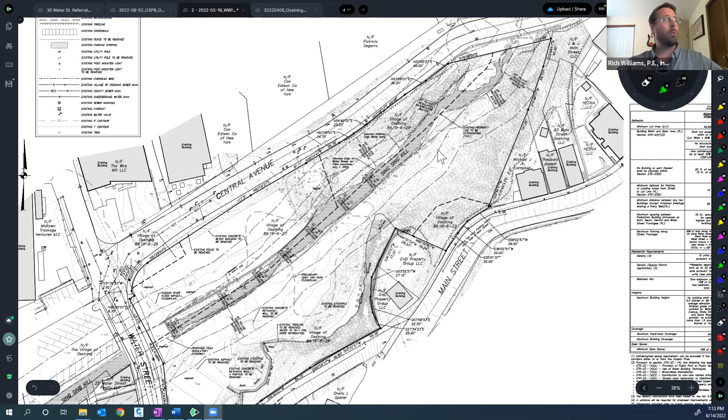So what we've done, and Maxwell will talk a little bit more about this in a few minutes, is we've focused our proposed development on the western portion of the site within the existing development envelope. A lot of that is to minimize impacts to steep slopes and tree removal, particularly around the Sing Sing Kill. To hit the high level of the components of our project, we have a 4-story parking garage in the northwest corner of the site, which sits in a very similar location as that existing masonry block building.

On the opposite side of the kill, we have our 8-story mixed-use building, which contains retail space on the first floor, as well as 109 affordable units and community space. We do have a connection, I believe it's on the 5th floor, that extends from our building to Main Street. So there's a direct pedestrian connection to Main Street. That was an element that the village thought was important to add.

And as you heard Linda and Jaime mention, and this really relates to zoning, we are proposing a subdivision of the property with a line that runs north-south in the middle of the site. What we're proposing to do is leave the eastern portion of the site for the village, and the western portion of the site would be retained by our project team, WBP Development.

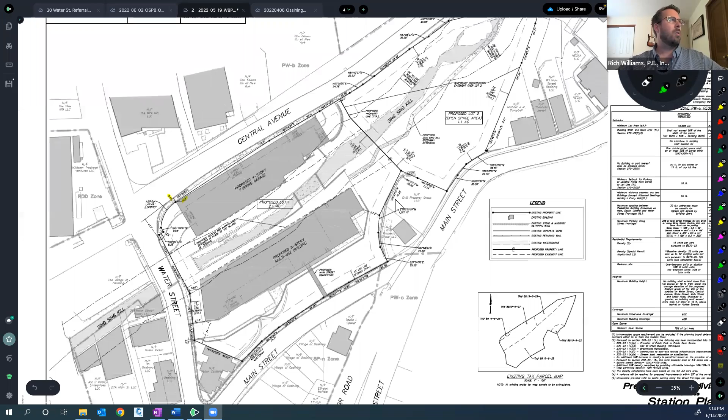In addition, some of the improvements that are being constructed are an extension of the Sing Sing Kill Greenway. There's an existing trail that follows the kill north of Central Avenue. We're going to be tying into that, running through the arch culvert, then coming southwest, where we're going to create a path that connects to the greenway, where we basically landed on the ground. You'll then have a walking path which leads you to a linear park in between the buildings, which will then allow a direct pedestrian connection from Water Street all the way up through Main Street.

As far as what we're really before this board tonight and talking about zoning, as a result of the site constraints on the property, namely the steep slopes, the kill, and the forested area to the north, and also an effort to stay in the existing development envelope and minimize impacts to those features, we've really had to locate the proposed development in the northwest corner of the site. We also had to do that while meeting the objectives of the village. Those objectives were creating this linear park, having an extension of the greenway.

We're also doing stormwater improvements in the kill, providing public parking on the fourth story of this garage. And just to spend a couple minutes before I talk about the variance, talk about the garage, in order to get the 4 levels of parking, one of which is public parking to the village. Again, the fourth story of this garage will have solar panels above it for green energy, but this parking will strictly be for the village on that 4th level.

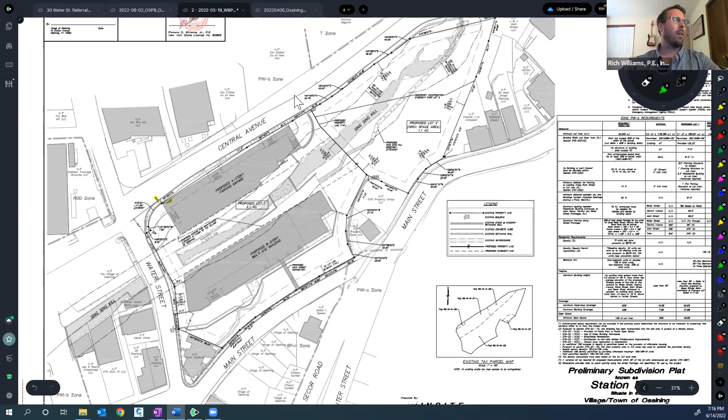In order to make that work, as you know, Central Avenue rises in grade. What we did was we created entrances to the garage along Central Avenue. That allowed us to take advantage of the grade rising along Central Avenue and also minimize the size of this building by not using internal ramps. And I'm only pointing that out because in a couple of seconds, I'm going to talk about variances, and that all plays a part into why we designed things the way we did.

As far as the variance necessary for this project, we're going to request variances for the parking structure being within 20 feet of the street. Your code requires that we hold 20 feet to the street line, again, in order to maintain proper separation to the kill or maximize separation to the kill to allow for a linear park. We're going to stay in the location essentially of the existing building. That puts us close in this corner of the property. We're 1 foot off the property line and 8.5 feet off the street line. So we'll need variances for both of those.

Also, our mixed use building. We had previously identified needing a variance for the front of the building being within this front yard setback. We just made some revisions in the last set. We were able to adjust the size of this building, so we're currently evaluating that. But although we identified it as a variance required in the package to you, that may drop out the next time we're before you.

We are going to need a setback from section 270.23D, which is the minimum setback for the parking or loading areas, being 10 feet to the street or lot line. Again, we have less to our parking structure here. As a result of the subdivision, our impervious coverage on this site alone is 65.6%, as opposed to the 60% required by your code. Again, that's something that's being created because of the subdivision line. If we were to take the entire property as a whole, we would be less than that coverage.

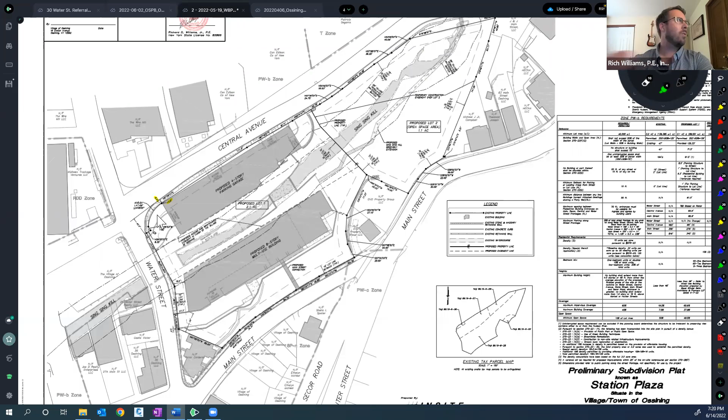Good evening, everyone. Before Maxwell starts, I'm looking at the faces of some of the board members, and I know we have not seen all of that area variance information that was just given. It wasn't given to us in our packet, so if we look kind of puzzled, it's because we have not seen that in its entirety the way it was just written out. It was just said. It is in the packet.

Yeah, and I think it's also still being finalized, but we did want to get this on your agenda to start getting you familiar with the project, and also to get any SEQR comments. Certainly, we're not at the point of making any decisions on those variances yet. And so that list is still being finalized, but we will make sure that you get a final list that's clear and easy to follow of the required variances.

Thank you. And I do apologize. I went through that pretty quickly, thinking you had already seen it. So if there are questions, we're more than happy to walk you through things in detail. Thank you, everyone. Again, my name is Maxwell Pau. I'm an architect and urban designer and a partner at Beyer Blinder Belle. We've been working on this project with the village and Wilder Balter for some time now.

And what I've done here is I just put together a little brief set so that we can go through the design. I think Rich did a really good job of laying out the land of what's happening on the site. But I can show some additional plans and pictures to give you a better sense of what we're proposing here. For us, we were drawn to this site because of the design opportunities that it presented. We're interested in designing a transit-oriented development with affordable housing on a formerly industrial site, just steps away from the train station. So for us, that was very exciting.

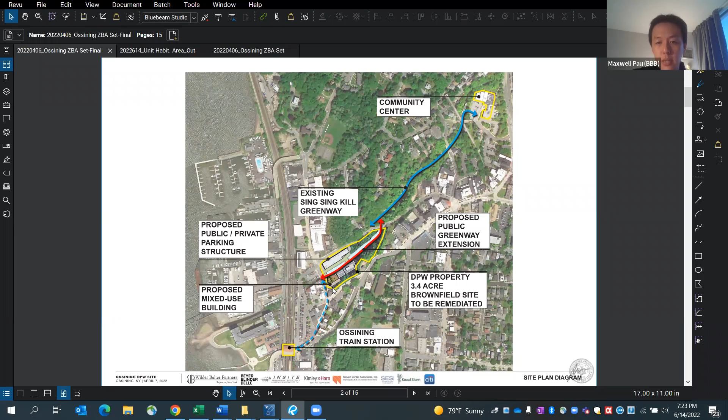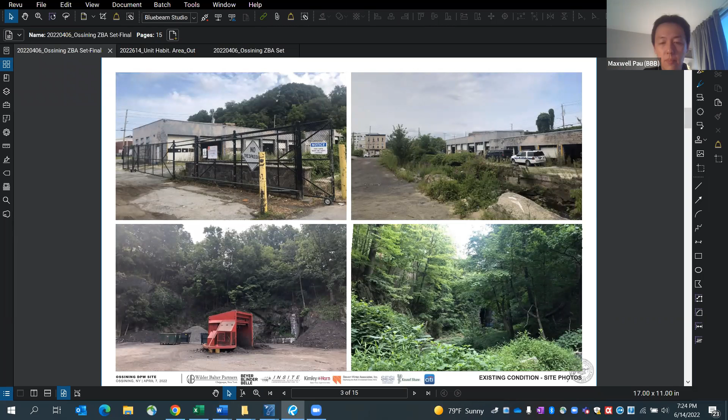I'm sure you're well aware of what the site looks like. When we visited the site for the first time, we were really struck by the pure physicality of the site and the multiple layers the site has to offer, including the very dramatic and drastic topographical changes, but also this change of character from a very urban place to an intensely natural place. You can see in this bottom right corner the forested portion of the site that we are intending to maintain.

So the shortest portion of the building is right off of Water Street, and the building steps up as it goes up along Main Street. So I'll show you an image of the building from sort of Secor and Main Street looking down. The intent is that the building sort of steps up with the topography of the site along Main Street. So you'll see how we sort of tried to achieve that.

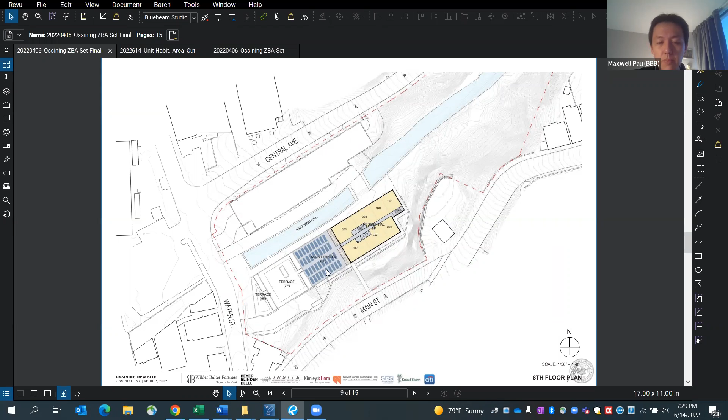The 8th floor happens to also have on the terrace solar panels. This building will be targeting a LEED Gold status, so there will be some solar generation on this project as well. And then when you get up, so that's the top floor. So the 8th floor is the top floor.

And then this is an elevation. If you're, I guess, sort of standing in the canal looking directly onto the building, you can see how the building steps up. Water Street is right here. The retail is right here at the base here. Residential amenities, residential lobby right here, and then the community facility space is right here on this end here. And then the forested portion of the site is on the left-hand side of this. And then you can see how the building starts to step up as the building rises along Main Street. Right, so it's an 8-story total height for the building.

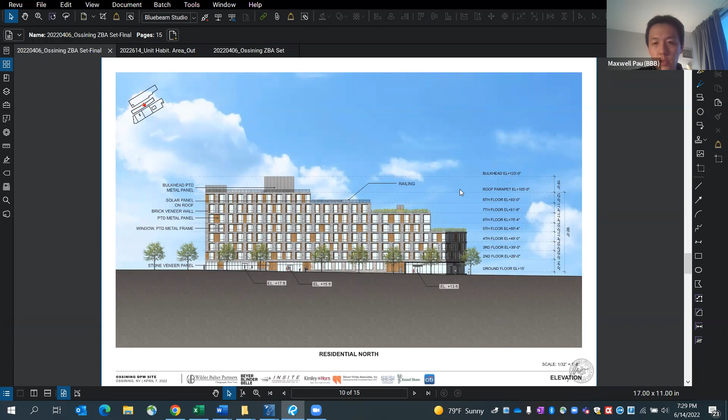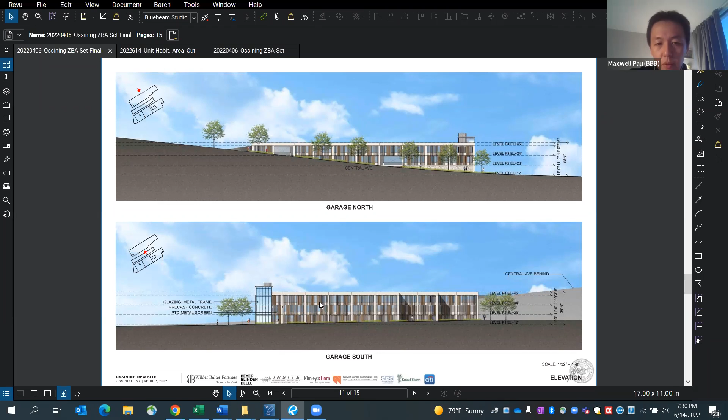And then just similarly, this is the elevation of the garage. So this is the elevation along Central Avenue, and this is the elevation of the garage along the canal. Again, just trying to use robust materials that reflect sort of the texture and the tonality of our surrounding here, which is heavily forested. So we have these sort of metal screen panels with a sort of wood-colored metal panel that sort of intersperse in the design of the facade.

So with that, I'm just going to kind of walk us through some of the views that you actually have in your package. So this is the view from the corner of Water Street and Central Avenue looking back. So this kind of gives you the best sense of the project. This is the existing photo of the same viewpoint. Essentially, this is the existing DPW building. So that's being replaced by the garage on the north side, the new residential building that starts to step up right from Water Street and up the canal. And then you can kind of get a glimpse of the canal right in here.

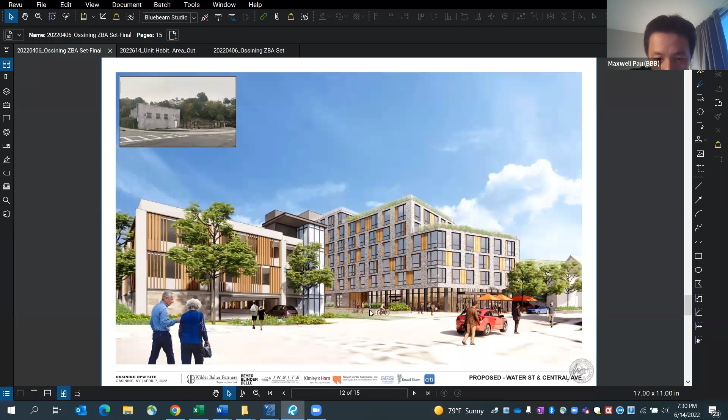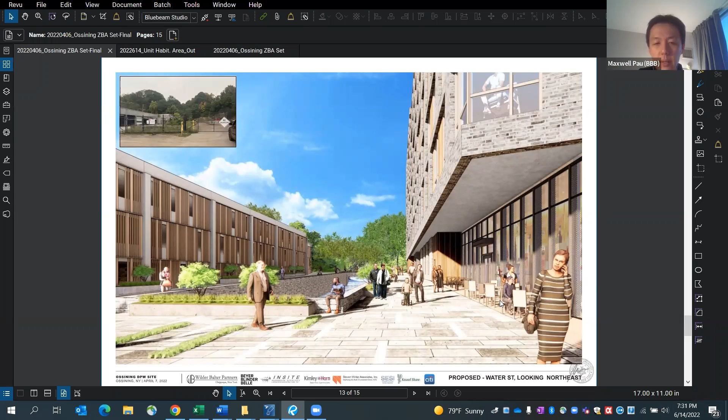And as we sort of walk our way closer to the building, this is where you would be today if you're up against the fence that's leading into the DPW. So on the right is the mixed-use building, on the left is the garage, the canal is in the middle. Right on the right here is the retail that's fronting Water Street and turning the corner up into the canalway. And then just a little further up, this is the residential lobby entrance. And then just sort of behind this wood panel here is the community facility space on the far end of the building.

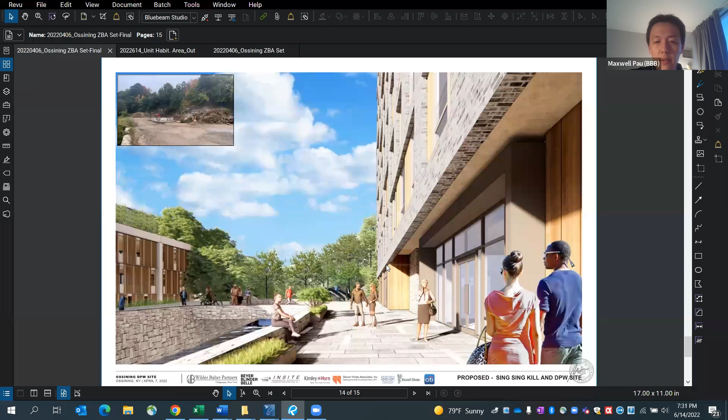And I think I have one more image, which is the view on Main Street and Secor. And this really kind of gives you a good sense of the scale of the building on Main Street, right? So again, at no point is the building rising greater than 4 stories above Main Street, or at least as viewed from Main Street. So you can see how the building starts to step down and kind of nestles back into the site. So that was a really quick overview of the overall design concept. If you have any questions, feel free to ask.

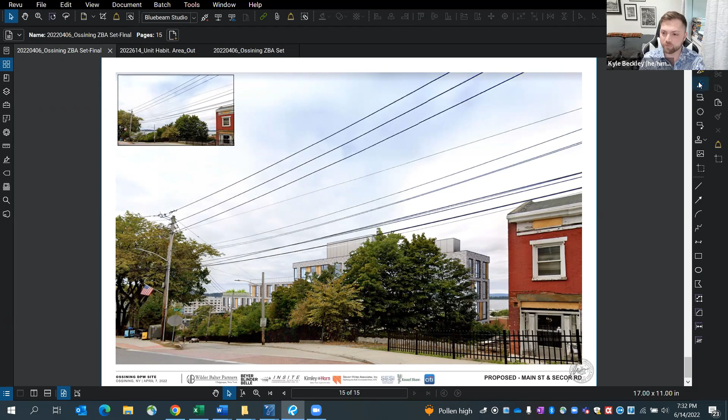Kyle, I see your hand is raised. Yes, thanks, Marlene. My question was about, and maybe I misheard, on the parking garage, is that covered on the top with solar panels or is that open? Is the solar panel just on residential? I think there was some change. Jim, can you speak to that? Because I know we were talking about that. Yeah, the plan is for solar panels, the garage as well as the residential building. Yeah. And I know that's not necessarily our purview because that would be SEQRA and planning board, but I was just interested based on, I saw one picture show one thing, but heard another. So glad to see you're doing solar panels on both.

I have a question of my own. Are you doing a floodplain review? I was just curious about going into the basement on that area that is prone to flooding. Floodplain has taken most of our time on this. Okay. Rich, you want to take that? I'm just trying to figure out if there's a car in the basement, is it going to end up on the 3rd floor when the first rain hits?

So the first thing we've done is we've set the elevations around the building, and particularly at the entrance to the basement parking, to be above the floodplain elevation, so to prevent waters coming in. One of the things we've talked to the village about is whether or not parking would be allowed down there based on the code and based on FEMA's regulations. We've had an engineer who specializes in floodplain analysis look at this, and yes, it is permitted.

We're also doing a floodplain study, which is being reviewed by the village engineer at the moment. We've already submitted it just to assess any potential impacts from this development on the floodplain. But the intent in setting the elevations was to prevent water from entering into the basement as part of the building design, and it hasn't been completed yet.

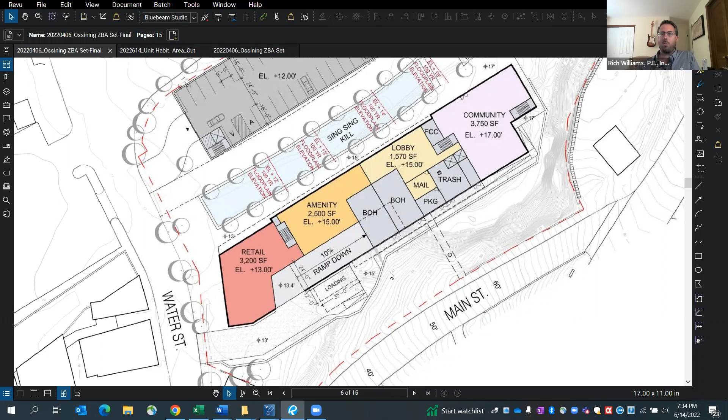Obviously, we'll have to be looking at the design of the foundation for hydrostatic pressures. That's one of the elements of the floodplain code. Also, we'll probably be looking at installing some pumps just for an extra backup and safety. Again, with all mechanical equipment being kept above floodplain elevation as required by your code. But yes, we're looking very closely at it and working with the village very closely.

It's a great question. Are you also looking at impervious coverage, like pavers and things that will allow the water to drain back and not continue to hold on to the water, or more grassy areas where needed? I know it's a concrete building, but is there anything else that you're looking at to help some of the drainage issues?

Yes, we've done a full stormwater pollution prevention plan, and I didn't want to go too much into detail, but I'm glad you asked, because there's a bunch of good stormwater things we're doing. We have a green roof on part of the mixed use building to help limit some of the impervious surfaces. That terraced area, a large portion of it's being designed as a green roof.

We also are looking at different paver materials, particularly on the side of the parking garage, to see if we do want to do some sort of grass pave. Final decision on that hasn't been made, but we have treated it as an impervious surface already in the stormwater calcs to be conservative. We're providing stormwater quality treatment units on all of our stormwater discharge points before anything discharges to the kill. So we'll get water quality treatment.

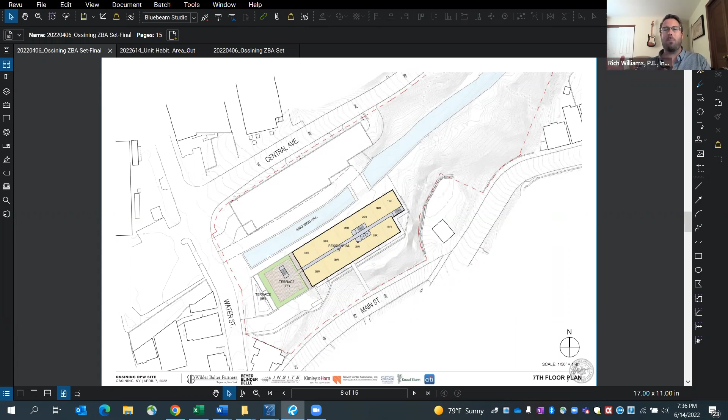We've also done a larger scale analysis, because believe it or not, one of the things I often struggle to explain is when you're this far down on a river or a stream or a reach in a larger drainage basin, it's actually beneficial to let the water go faster. What happens is, by the time the peak of the overall kill comes down the hill, if we hold our water back too long, we can actually line up with the peak.

If you ever listen to CBS 880 News, you'll always hear the Passaic River is flooding 3 days after the rainfall event. And that's because down at the end of the river, it takes that long for the peak to come down. So, we've been working with the village engineer on timing when we release our stormwater and strategically releasing it earlier based on our downstream position.

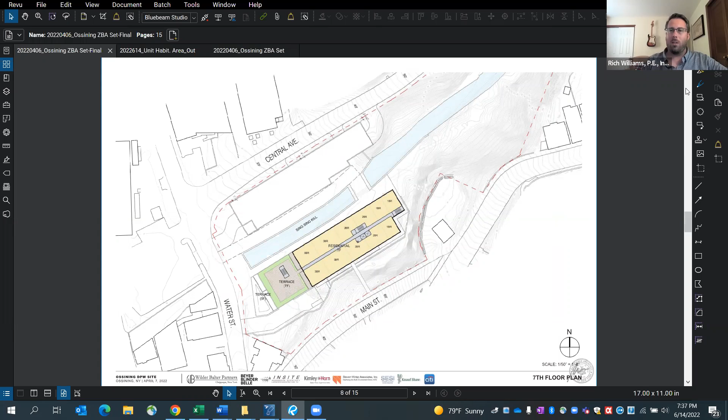In addition to that, we are providing a stormwater basin along the kill. That is being developed in concert with a series of weirs that will cross the kill. One of the issues the village has historically had in maintaining this section from flooding is during the first flush, a lot of the debris, garbage, large tree branches, come down and hit the culvert at Water Street and form a dam under the culvert, so the water backs up into the kill.

And the first place that it is going to fail when that happens is the DPW site. And then from there, it overflows Water Street and into the parking lot on the west side, in between the railroad tracks and our site. So what we've been talking about, and this was actually part of the original RFP, was building a stilling basin off of the side of the kill, which integrates with the kill.

And we're doing that basically up into the site, closer to the culvert, in an area where the topography allows, to help dissipate velocity. We're creating basically a shoaling basin. It'll be a little deeper than the kill itself, so that debris can get caught and collected and more easily maintained. That basin has been strategically located with a series of weirs to cross the kill, so that we can try and catch that material in the large, deep valley to the east of the site.

And the hope, and this is something the village engineer has been talking about for a while, the hope is by catching the debris there, where we have a better opportunity to create higher floodwaters, is it will no longer clog the Water Street culvert and create the problems for Water Street and the downstream parking lot.

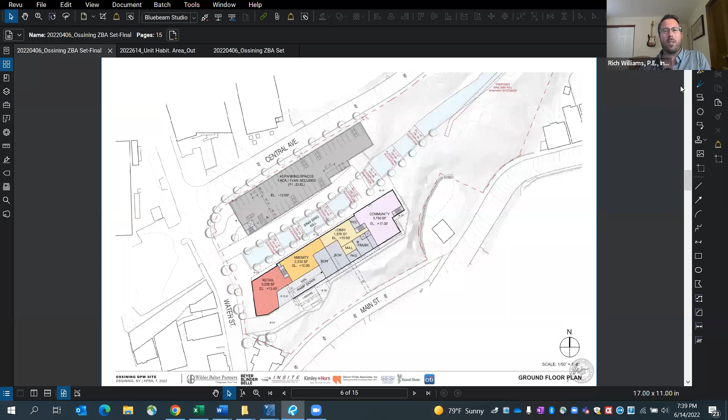Great question. So we have provided tree removal plans. A lot of the eastern portion of the site, we're actually not touching any of the trees, particularly on those steep slopes. We don't want to. The area above the existing DPW yard, between the yard and Main Street, has a lot of smaller growth trees. We are taking trees down in that area, not because we want to, but actually from a geotechnical engineering standpoint, we have to. Those trees probably should never have been allowed to grow. They're actually compromising the slope stability.

Just to the right of Maxwell's cursor right now, there's a house. Behind that is a series of retaining walls that actually ties to the walls on the DPW yard. One of the things that the village negotiated pretty well with the developer was making sure that the majority of those walls are actually going to be on the developer's property, not the village's. So we do have to make sure that those slopes are secure and stable for the future. So there will be some tree removal along those slopes in order for us to properly maintain the slope. And again, it's been recognized even by the village engineer that probably should have already happened.

Other than that, there's a handful of trees necessary to come down that are invasive in and around the kill as part of creating the linear park and redeveloping the training walls for the kill. There's a small number of trees being removed for that 4th floor entrance to the garage off of Central Avenue. But for the trees that we are removing for the development, we are providing mitigation. And again, anything on the eastern side of the property, where the majority of the forested area is, we'll be preserving. And that'll actually become village-owned property, so it stays preserved.

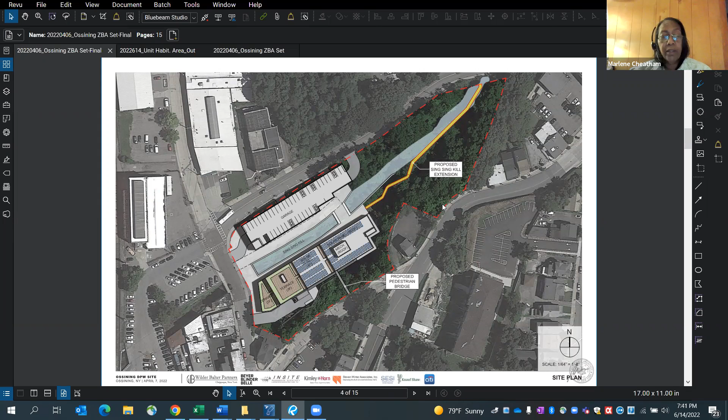Okay, any other questions from the board? Okay, and I'm gonna go back to Linda and Jaime. So for tonight's meeting, anything that we would like to bring back to the planning board as they go through the SEQR process? Yeah, and I think you've already identified some things. They're all things the planning board has already been focused on. Obviously, the floodplain, the stormwater management, the flooding issues with the kill, the tree removal, wildlife, those are good comments and things that the planning board is also focusing on. So, along those lines, if you have any other things like that you think are of concern that you would like the planning board to make sure they're taking a look at.

Yes, Michael. Yeah, a couple things I think they should look at. We discussed a little bit about each one so far. This is going to be an 8-story building, so I'm sure that's not going to be missed by the public. It's going to be the same height as the new condos that were developed across the street. So it is a fairly substantial building, and I would think any kind of viewscapes from above would be something they would have to look at. Also, I drove past the site, and there's a significant amount of debris, not only in the kill, but also in the garage, old trucks, things of that sort. I assume that all of that's going to be taken care of.

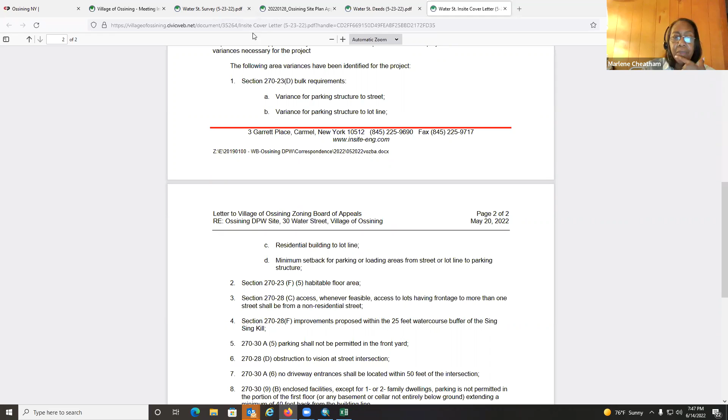What I was asking for is, this is very broad brush. I would like to know if there was a more detailed one. It just says variance for parking structure to street, but there's no numbers with it. You want the numbers? Yes, exactly. Normally we get the worksheet that shows all that, and that wasn't there. They're going to have to give you the worksheet at some point because they also have to do that for the habitable floor area. For each type they'll give you what they're supposed to be, what they're proposing, and what the variance difference is. So this will be broken down with more detail as we go along.

Yeah, so some of the finalization of those numbers is still happening. And we went over some of the details like on the habitable space today, for instance. We definitely want to get that to you, but this is the listing essentially. We don't anticipate anything beyond the listing of the types of variances that are going to come forward. Now, one of the things we did talk about earlier today was the habitable space. Rich and Maxwell, you brought that up today. So I want to know whether you wanted to talk about that today or get into those details at a later meeting.

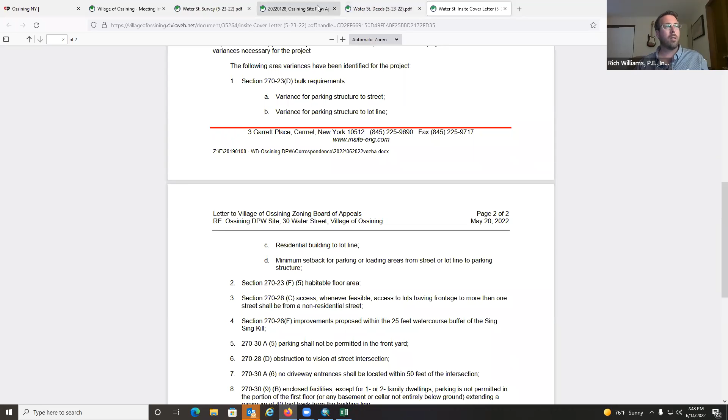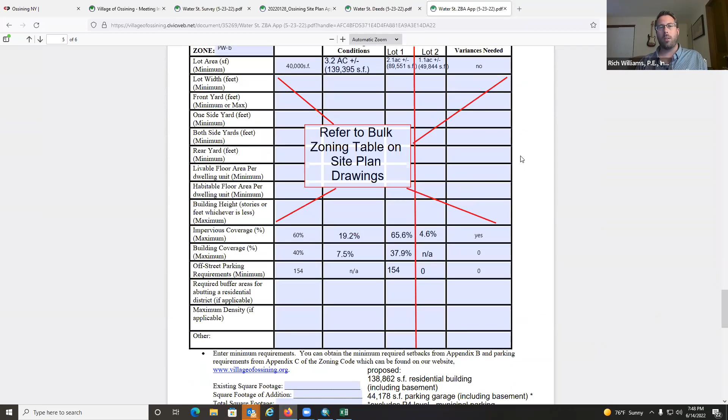But before we jump into that, just for the board's benefit between now and the next time we're before you, as part of our application package, on our preliminary subdivision plat as well as on our drawing EX1, we do have a zoning conformance table which walks you through the items in the zoning. Some of the items which aren't part of your typical bulk standards aren't on that table, which is why we cited them in the letter. But we're developing a simple table, because we have a bunch of different memos flying around, which talks about what's required, what's provided, and the variance we'll be seeking.

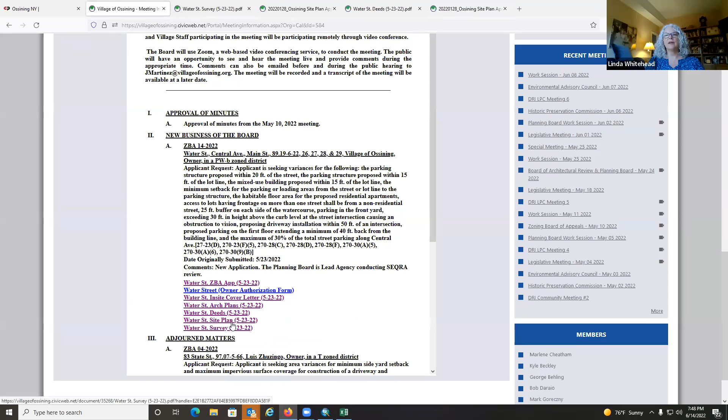So it's on the Insite site plans, the table. Yeah. So that'll be a good preview for you as to what's going to be on the simpler matrix we're going to provide. It's that large table on the right side of the sheet.

So this is that bulk table we refer to. Yeah, we're in the process now of simplifying it just to the variances, because that's a lot to go through. Plus, there's still some numbers we're still working out, like the layout of some of the apartments. So to give you the exact numbers, we're still in progress of working on that.

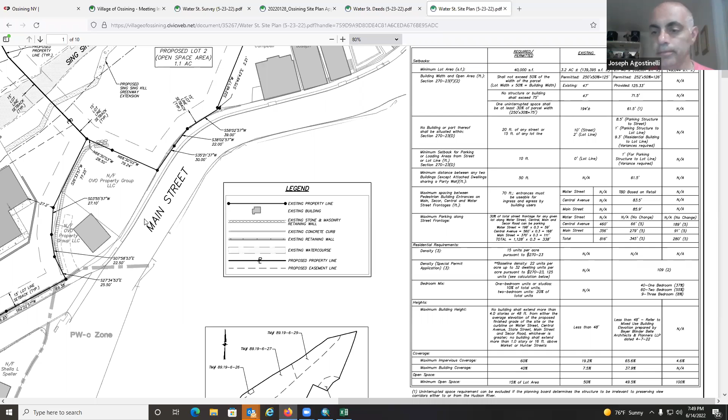Actually, Jaime, I do have a one pager. If it's helpful for the board for me to go through that, at least to get that conversation started, I'm happy to do that. Yeah, I think that'd be helpful. A lot of the other variances listed here are ones the board is pretty familiar with. They're sort of similar. This is one I think we should try to get the conversation started earlier rather than later. Okay, sounds good. So I'm just sharing my screen now.

So we are seeking a variance on the code language relating to the minimum unit sizes within our district. The district has minimum habitable sizes for all the unit types. The 1 bedrooms require 600 square feet, 750 for the 2 bedrooms, and 1,000 for 3 bedrooms. But this building is also subject to design regulations from New York State HCR, the Homes and Community Renewal Program, which specifies minimum and maximum unit sizes.

What we're trying to do on this site is strike a balance of creating well-designed and efficient units that meet the needs of today's tenants, while also not oversizing the units to the extent possible, which of course adds costs and ultimately reduces the amount of affordable housing that's available.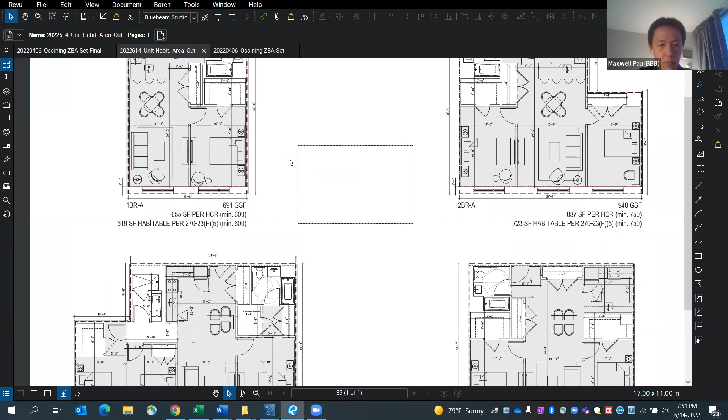So what I'm showing here on the screen is 4 of our most typical units in the project. There's a 1 bedroom here, a couple of 2 bedrooms on the right, and then the 3 bedroom. What I wanted to do is demonstrate how we calculated the square footages and what the various square footage numbers mean for us. Let me see if I can zoom in here. So let's start with the 1 bedroom apartment. I've listed 3 square footages.

The first number is the gross square footage, which is the most commonly used square footage that projects generally use to describe unit sizes. It's all inclusive, includes the exterior walls, includes the center line of demising. So that's about 691 square feet, which is a pretty standard size for a 1 bedroom apartment.

Based on the calculation for HCR, which excludes exterior walls but does include everything else within the apartment, it comes out to 655 square feet. And the minimum per HCR is 600 square feet. So we're a little bit over what's required by HCR.

When we do the same calculation, based on my understanding of the village's code for habitable floor area, we're coming out at everything that's shaded in gray. We've excluded the areas that do not count under the code for habitable area, which is everything in white. So we've taken all of that out, and we're at 519 square feet based on habitable floor area per the village's code. And of course, the village's code for livable floor area is basically the same calculation as the HCR number. So there's some relationship there.

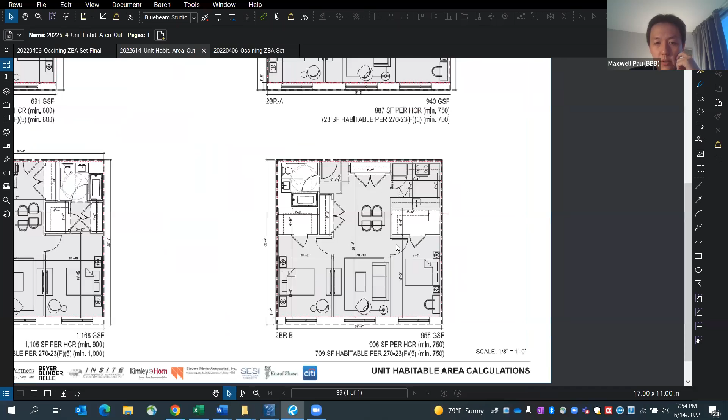And then similarly, another 2 bedroom, our most common inline 2 bedroom, similar situation here. It's around 950, HCR just over 900, and then the habitable is at 709. Again, we have two walk-in closets here. And then the 3 bedroom is really, really tough because of the requirement to go from 750 in the 2 bedroom to 1,000 square feet. So this 3 bedroom is about 1168 gross, which again is a pretty sizable apartment. For HCR, it's at 1,100, and then the habitable is at 819, whereas we'll need 1,000 square feet.

So I think the other challenge, particularly for the 3 bedroom, is if we were able to, let's say, gain another 200 square feet of habitable floor area, that would put us over the maximum allowable per HCR. So we're kind of stuck between two rocks, I guess. So what we're seeking is a variance to allow us to proceed with units that are a little bit below the habitable floor area requirements of the village.

Maxwell, you touched on something that I think is really important for the board to understand here. You referenced maximum size units under HCR, which limits how big you're actually able to make these and continue to get funding from HCR. So can you talk a little bit about how that works and how it impacts your decisions on design?

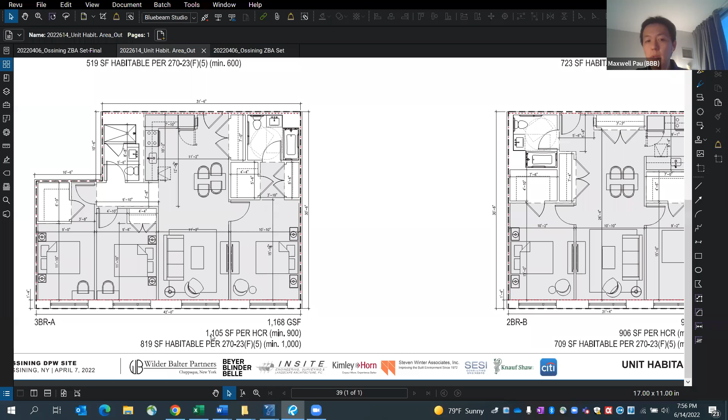So for a 3 bedroom, the range that's allowable for HCR is 900 square feet to 1150, right? So we're right in the higher end of that right now at 1100 square feet. So if you imagine us adding a couple hundred square feet of habitable, we'll be at whatever, 1300 square feet, right? So we'll be over in the 3 bedrooms. On the 2 bedrooms, it's 750 to 950, but I think we're pretty close on the 2 bedrooms, we're not too far under here. And then on the 1 bedrooms, the range is from 600 to 725 for HCR square footage.

Yeah, so one of the things in our internal conversations discussing this project and other projects that have come up before is that one of the challenges with the way that our code is written now, and I anticipate that it's going to be re-examined over the next year internally and potentially changed, is that it discourages cabinets or closets, right? So under our code, you could potentially put in one of these Chinese closets that aren't built into the wall, and that doesn't count against it, but having a built-in closet does, right?

Having a large bathroom, so if you have an ADA accessible bathroom, which is typically a little bit larger than a regular bathroom that is not ADA accessible, is going to cost you more against your habitable space. And so what ends up happening is pantries, extra closets, things that I think most people want to get in their apartments as amenities, developers are at a disadvantage in providing these.

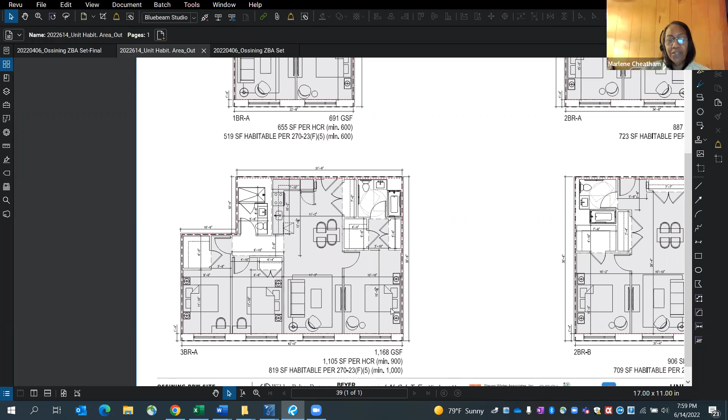Bob, you have your hand raised? Yeah, I take some exception to the concept that our habitable space requirement is unnecessary. Our boards, all of them, the village board, planning board, everybody. Hold on, let me finish. It's really hard to come up with these, and I understand that this is unusual in that for the funding purposes, there's a maximum as well that has to be taken into account.

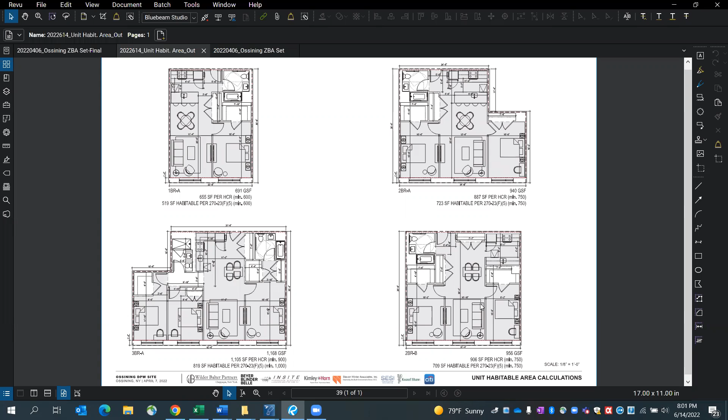But to discount the habitable space requirement as unnecessary, I don't agree with that, and I don't think we have that so that we reduce the size of bathrooms and kitchens and whatnot. The idea would be to have fewer units so that all the units had the right amount of habitable space without sacrificing the amenities. That's all I wanted to say about this.

Okay, well, before we start mixing apples and oranges, I know they're all in the same fruit bowl, but I think what Jaime and Linda were really saying is the way the village has put in our current code does not fit 2022. And I think that's something that needs to be looked at a little differently. Nobody says we take away habitable versus livable, but we also need to look at where we've changed. Not all houses built in 1952 or 1950 or 1930 or 1929 had closet space.

So now we're living in 2022, there's a different look, and I think the question is how we look at where we are currently and what people are looking for when they're going to look for an apartment. If I'm going to look for an apartment, I don't want a Chinese cabinet. I want to know, can I have a walk-in closet? I think those are the things that people are looking for, and that needs to be on the forefront of where the village is moving to. And I know that this is not going to get solved tonight. Thank you, Jaime and Linda. I wish it could be, but it's not. So we have to work with what we have in front of us.

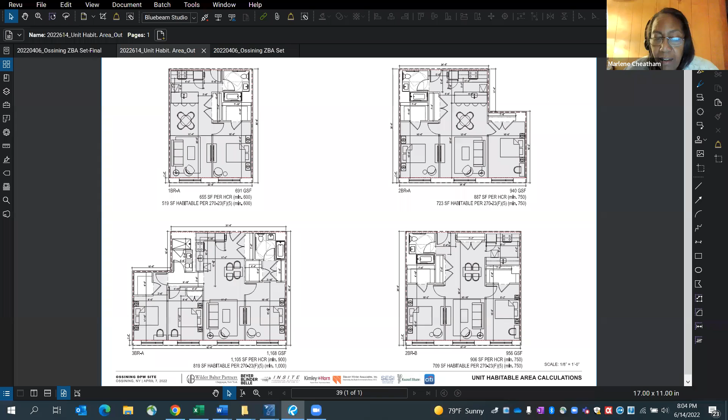If there is nothing else, I don't see any more hands raised. I don't see anybody jumping up and down. I think we can go on to have a motion to adjourn this to the July meeting, following the planning board, who will be doing the SEQR review. Yeah, I know. So moved, Bob.

May I have a second? Second, Olga. So it has been moved and seconded. I will say, let's do a roll call vote. Bob Dureo, aye. Olga Montez, aye. Kyle Beckley, aye. Michael Spall, aye. Marlene Cheatham, aye. Okay, gentlemen, we will see you in July. Thank you. We're looking forward to it. Good night.

Next on our agenda, if there's no changes, is ZBA 04-2022, 83 State Street. Yes, so 83 State Street is an adjourned matter, but they have marked the area where they want to remove the asphalt. Joe, I sent that email out earlier today. I'm not sure if Greg and or Gary organized an appointment with the person to go out there. Yeah, I think they're scheduled to go there tomorrow.